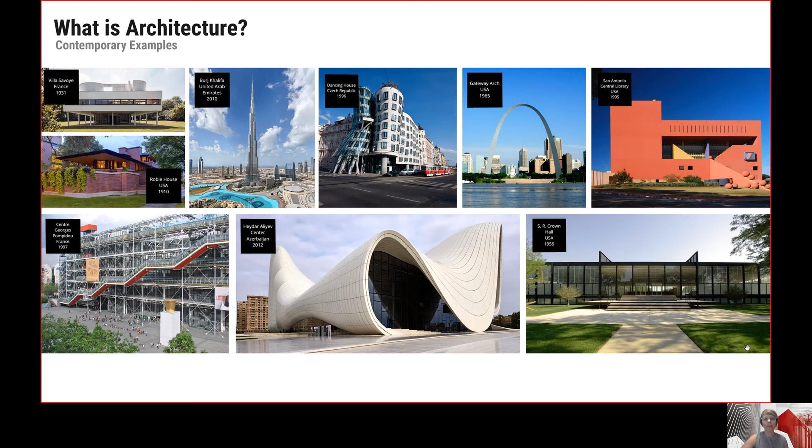Over the millennia, the field of architecture has also greatly expanded. Something to think about is that those who are interested in architecture may find themselves drawn to similar careers in such things as landscape architecture or furniture and product design, where you might look at the everyday devices that people use in their homes.

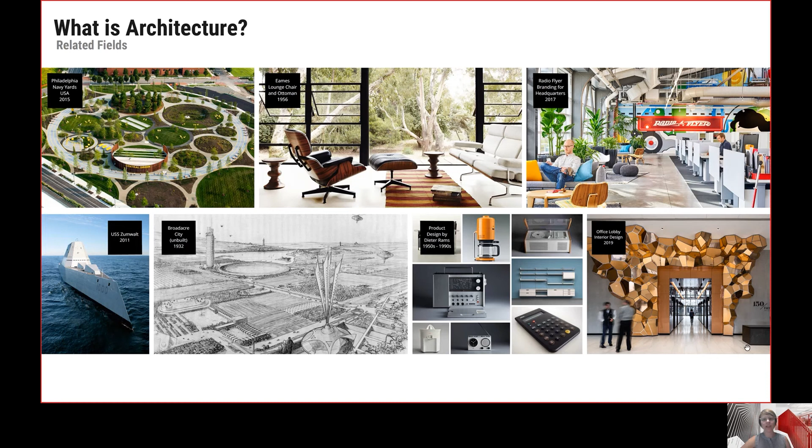Or you may be drawn to brand design or graphic design, or perhaps naval architecture or interior design, down to the smaller details of an interior project.

And in the design of buildings, architecture includes a broad range of what we call typologies or building types. So today, architects have the opportunity to design and study and influence things on the scale of a sports arena all the way down to a single family home.

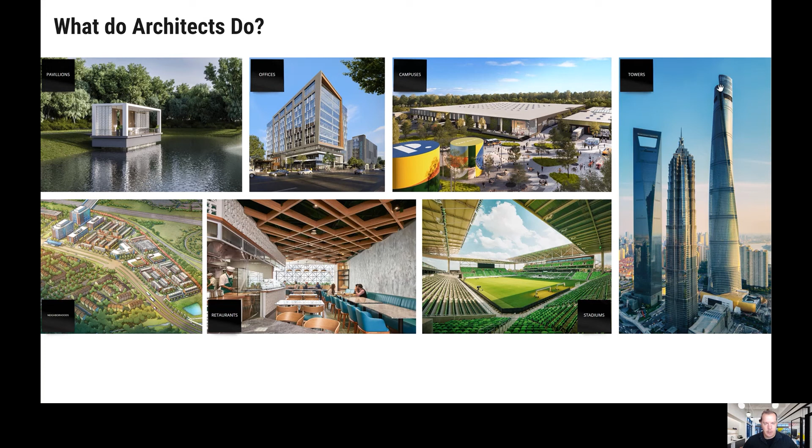One of the things I like about architecture is that we get to work on all different types of buildings, different styles. We can be working on cities, stadiums, campuses, interior or exterior, and locations all over the world. So every day presents us with something new.

In terms of roles, there are many different roles when working on any of these projects. On a larger project, some of these roles might go to individual people. You'll have a designer, a code expert, an urban designer, an urban planner, an engineer.

which we call a project architect, who helps put everything together, the manager running the business side of things, and then sustainability experts. So on any given project, we can have many different roles for people, or on a very small project, it could be one architect doing all of these roles themselves.

So an architect really has to know a lot of different subjects, and we're constantly learning about all different manner of things that affect the built environment.

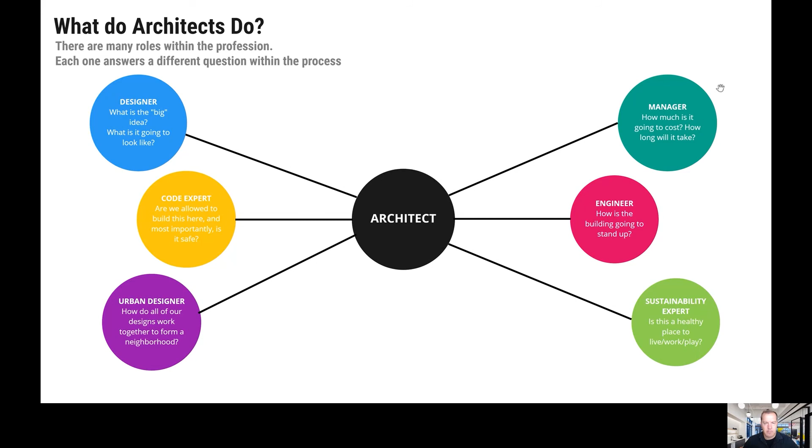One of the things that I like about architecture is getting to draw and getting to create things. The way we do that throughout the process is through hand drawing. We do a lot of computer modeling.

We do coordination, so we work quite a bit with other people. And then when the project finally gets into construction, we're making site visits and working with the contractor partners to make sure that everything we've designed gets built smoothly.

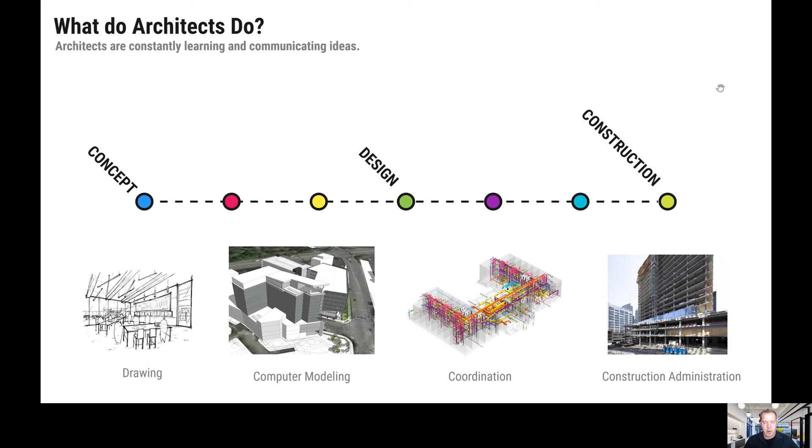So it's a constant process of learning and communicating ideas and just meeting with different partners along the way. And within Gensler Raleigh, being that we live in such a growing and dynamic area, we've been fortunate to work

on a number of different projects, sizes and scales, from office buildings to interiors to retail shops and plazas. So it's really, as an architect, you get to work on a number of different things, meet new people, go different places. So it's really a fun and interesting profession.

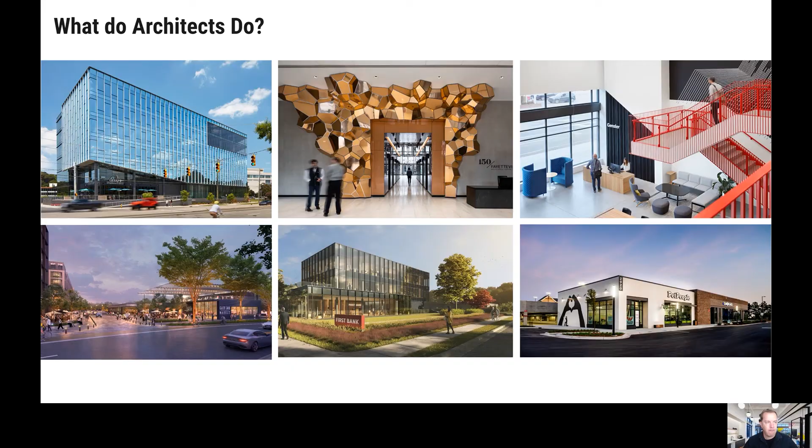The project we're going to share with you today is located in downtown Raleigh. The site is named for its block number within the city grid, dating all the way back to 1914. We've included a copy of that map here on the left-hand side of the slide and marked the location of the site with a blue star.

In the aerial photo on the right, you can see the two buildings that now sit within the block and share a common courtyard in the middle. Today, we're going to zoom into the courtyard and show you the kiosk between the two buildings because it's a similar project type to the one you'll be working on this year.

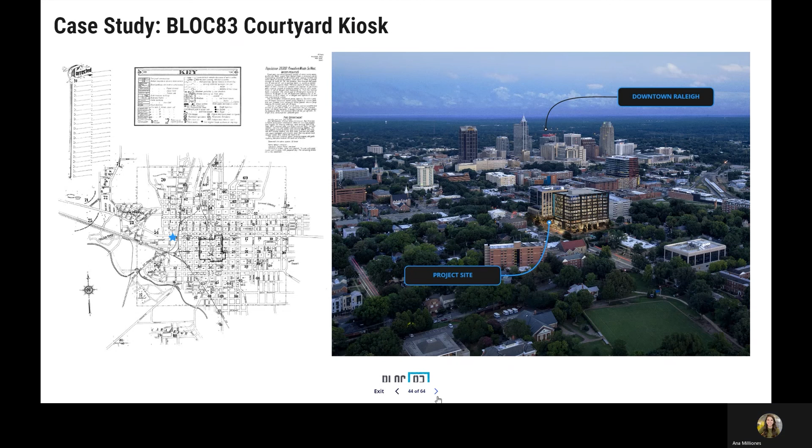We collaborate with landscape architects to design the areas around the building, like paving, planter boxes, and benches. The site is just as important as the building itself, and you will have an opportunity to design your own site with your project. Buildings start with an idea and a purpose.

A building's purpose is centered around how people will use it and how it's creating a better experience for its users. This is a retail kiosk and it's intended to have a cafe type program that can serve tenants from the two buildings along with the general public.

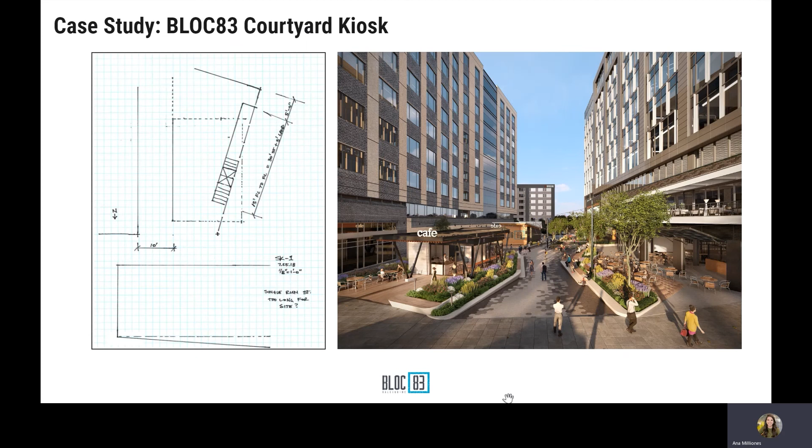During schematic design, it's important to push yourself on ideas and ask what if. It's the phase to really be creative and try new ideas, even if they may not work at first.

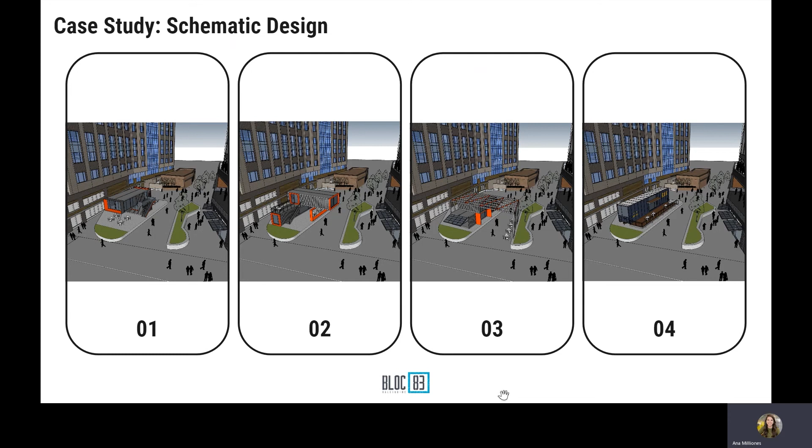We work through floor plans to make sure the right spaces are next to one another so we can ensure the building will function well. After schematic design, we move into the next design phases where more and more detail is layered onto the initial idea until the full project is complete.

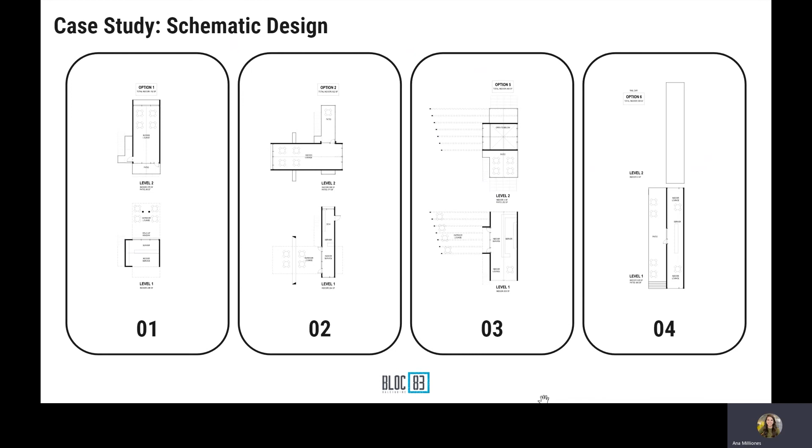It can also be used as an outdoor work area throughout the day for the building tenants. You can see how integrated it is with the site design and how careful attention was paid to the user experience. Next, we're going to take you through the construction document phase and show you what drawings architects create in order to realize a building like this.

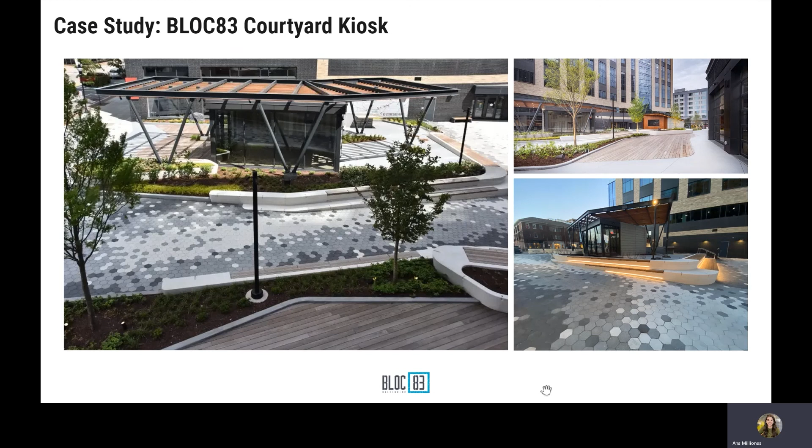I'm going to elaborate on what Kevin discussed, what an architect does, by diving more into the case study Ana presented and show you some of the drawings created to communicate to the contractor.

An architect not only has to design a building, he or she must create a set of instructions in order for that building to be built.

With construction drawings, the images are always to some scale, so that they accurately depict the building or elements, and they can be measured from the actual drawing set if needed. You'll learn more about this later, but a common scale is 1/8 of an inch equals a foot.

Basically what that means is every time the contractor measures 1/8 of an inch on the paper, it equals 1 foot in real life. Therefore, if the contractor measures 1 inch on paper, he or she knows that the element in real life will be 8 feet. The larger the fraction, the more zoomed in the drawing is. Again, you'll learn more about this later.

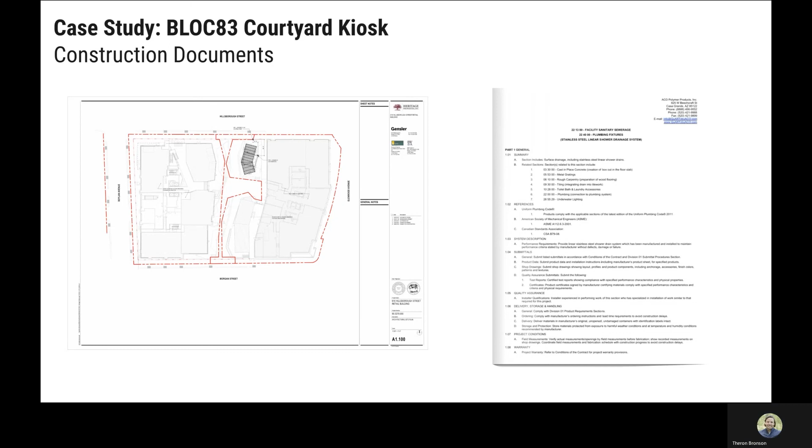In order for a contractor to be able to lay out a building, one of the first drawings he or she will need is an architectural site plan that shows where to place the building on the site. Usually a reference point to the property line or a marker on the site will be used in order to dimension the building to the actual site.

You can see here that the reference point is at the intersection of these two property lines in red. The architectural site plan will show adjacent buildings, property lines, sidewalks, roads, while other site plans in the drawing set provided by other parties like the civil engineer will show utilities and other pertinent information to the project.

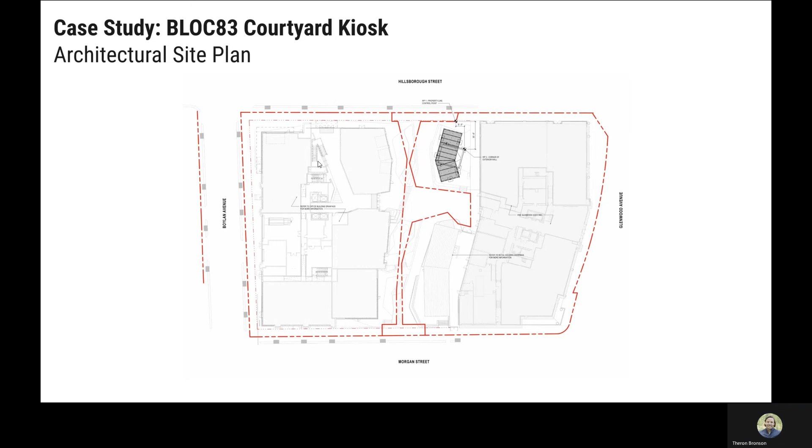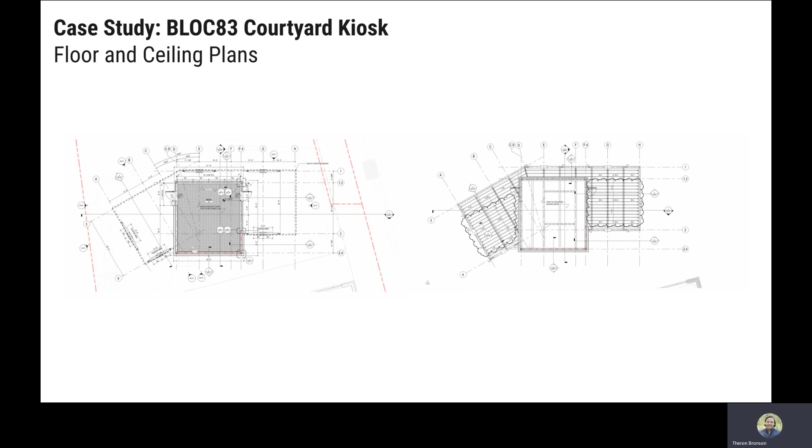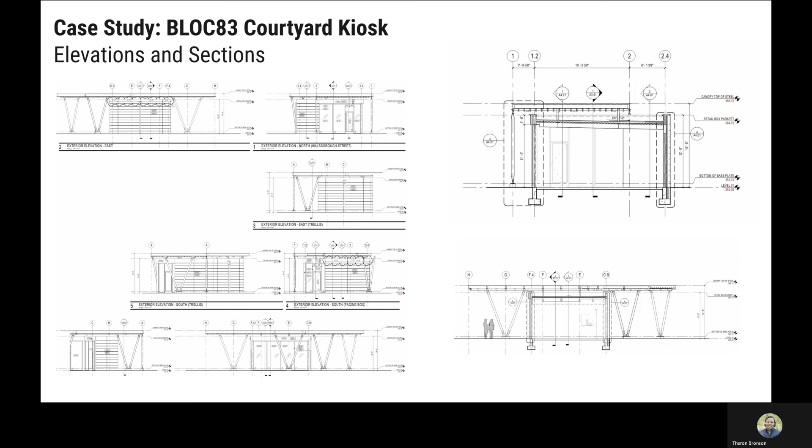Because buildings are complicated, zoomed in drawings called wall sections and details are needed to show the assemblies of the envelope of the building. The envelope, also sometimes called the skin, is the exterior materials that enclose the building. There are several layers and parts that all work together, hence why it's called an assembly.

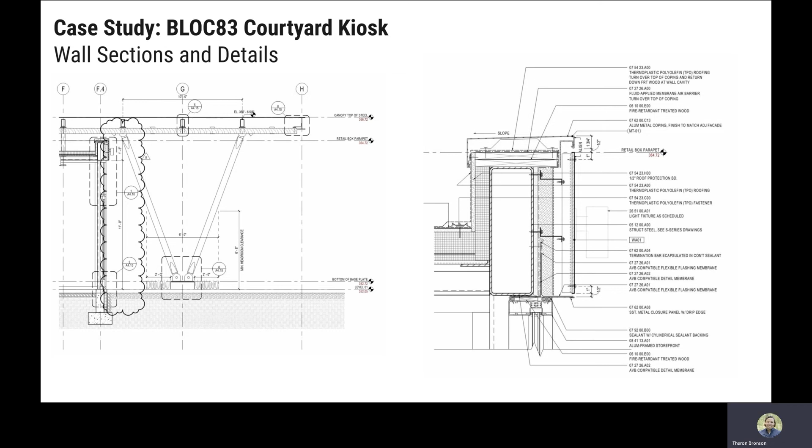Here you can see a wall section to the left and a roof to wall detail, which is called a parapet. To touch on scale quickly, the wall section shown on the left is 1/2 inch equals a foot, where the detail on the right is 3 inches equals a foot.

Lastly, architects will sometimes provide diagrammatic three-dimensional drawings called axonometrics. These images provide the contractor with a 3D depiction of the building or item to better understand it. Sometimes you see that there'll be just certain parts and pieces shown, and sometimes they'll show the actual whole building.

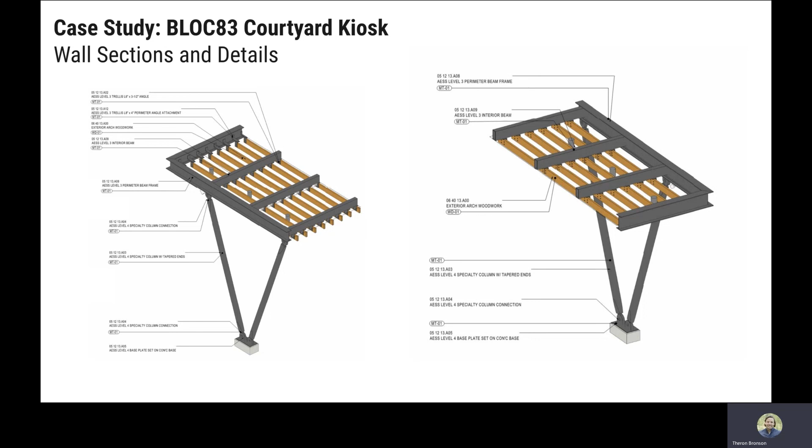Let's chat about the importance of precedents in the creative process. You've probably heard the phrase that something is unprecedented, meaning something has never happened before, or there's no historical context for something like that to have occurred. Context is very important when it comes to design. It's what allows designers to be creative and seek out incrementally new ideas or methods of building something.

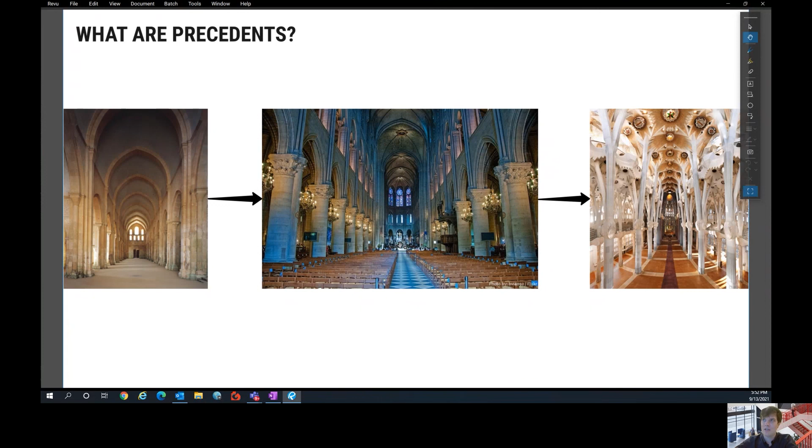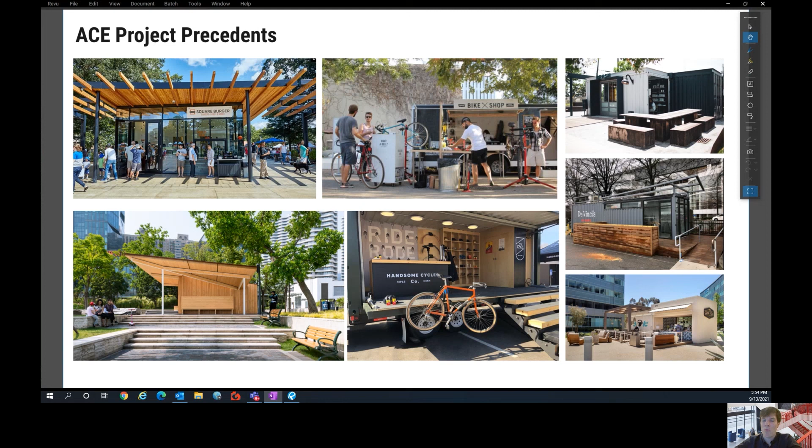When thinking about precedents, take a look online at sites like ArchDaily. You can learn a lot about projects on this website and easily search from thousands of projects around the world to help draw inspiration from.

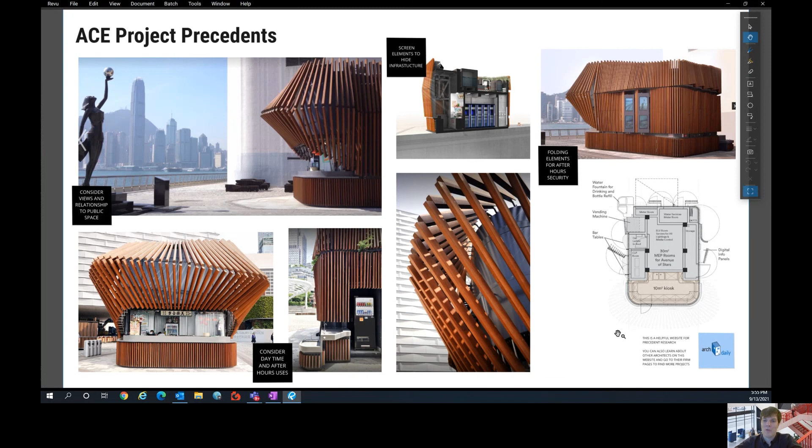Hey everyone, my name is Dustin Brugman and I'm an architect at Gensler. We're going to look at a few bridge precedents and extract some specific takeaways from them.

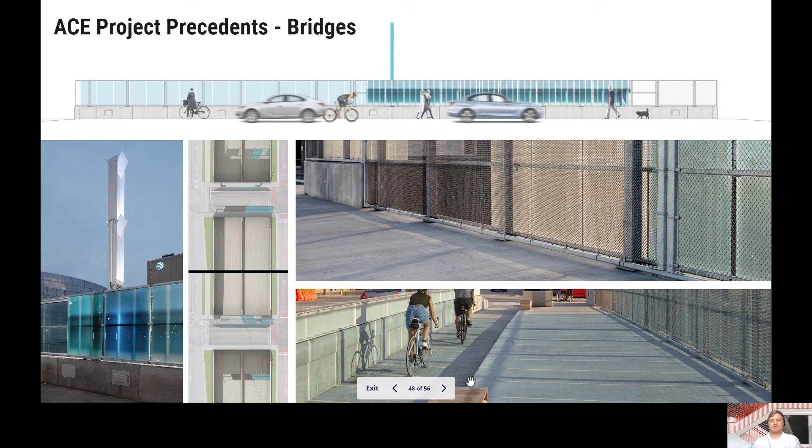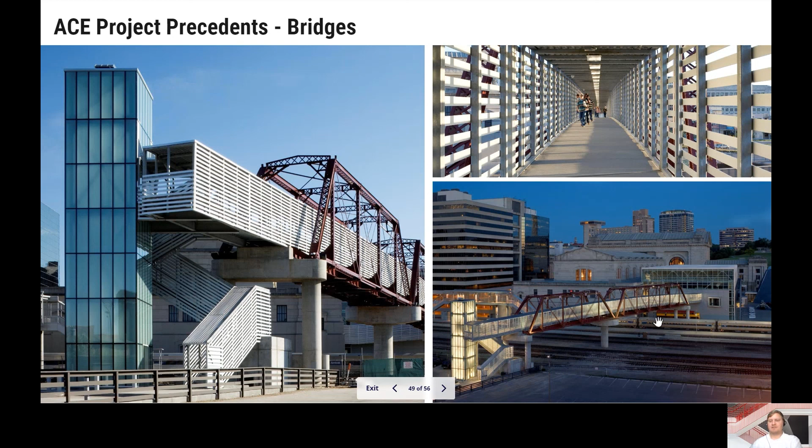Lastly, perhaps you don't want your bridge to be in a straight line from A to B. Maybe you want to incorporate some more curvilinear lines or even a mast-like structure that helps hold the bridge up, like you'd see in a sailboat. Once you've decided on form and the route you want to take, really think about those details at the human scale and how really simple, elegant design can make that journey across more beautiful, like in this detail, which is a close-up of the railing right here.

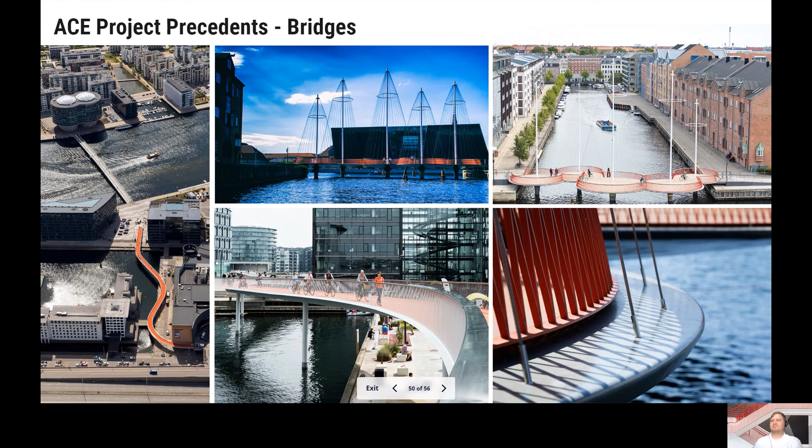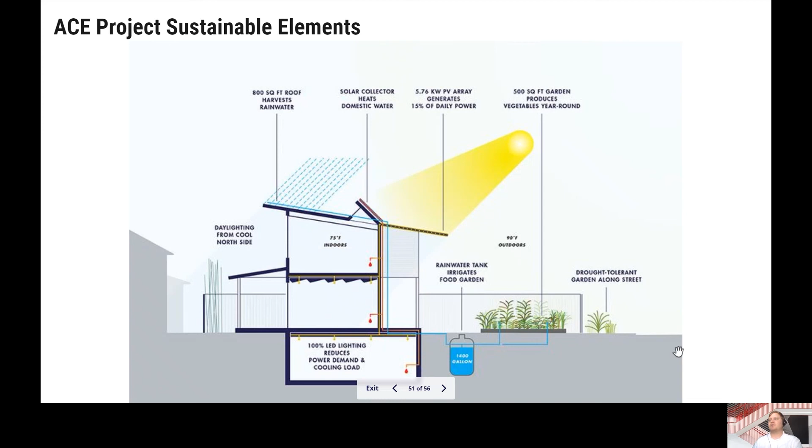We also wanted to quickly introduce you and help you start to consider some sustainable strategies. The earlier you do that, the better, because every decision you make will really affect the potential you have for being off grid or self-sustaining. That has to do with how you orient your building to allow the most sunlight, maybe solar panels, or how you're collecting rainwater, or just really interacting with the environment around you. In a future ACE session, we'll cover and elaborate on a number of those strategies and introduce you to LEED, for example. But we just wanted to quickly introduce you to a couple active and passive strategies, like the solar orientation, and really just being conscious of what you can use in the environment to make your building or bridge better for the environment and for sustainability purposes.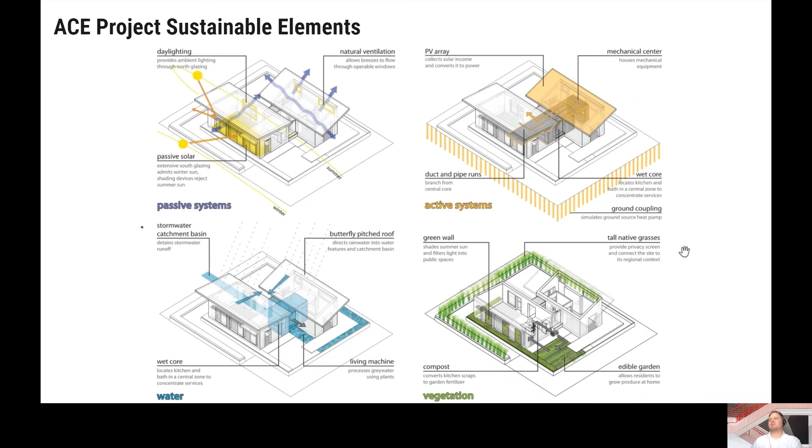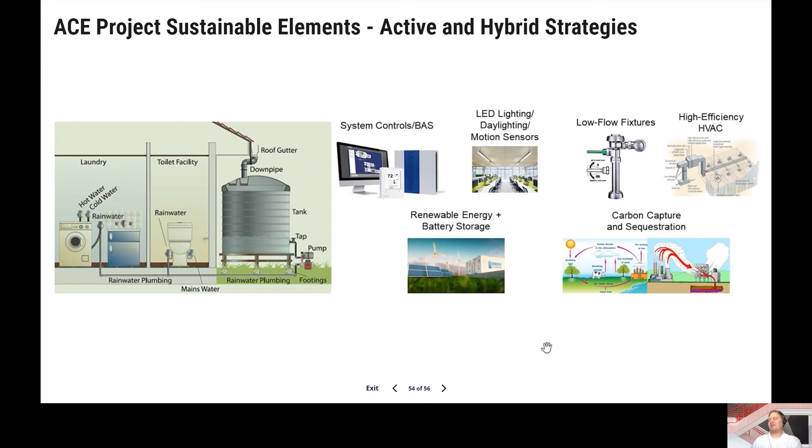So we really want you to think big about your project first off, and we'll get into a number of these things. The engineers will love talking about all these fixtures and systems that you can use. There's plenty of things to go over, but think about those big picture ideas first, and we'll get to some of these really interesting things that we can integrate into our buildings later.

In conclusion, we just want to thank you for listening to us explain what architecture is, because we could have lectured for days if you really let us, and you're welcome for sparing you of that pain. We do hope this adds some context to the lessons we have for you coming up, and it really gives you some perspective and inspiration to get your project started. So thanks.